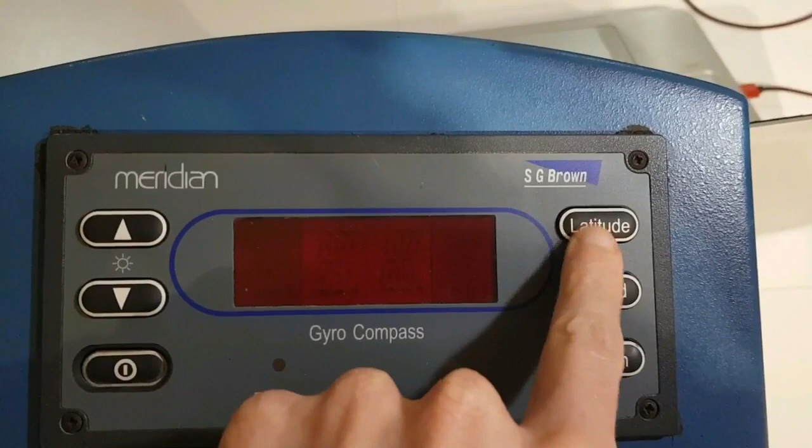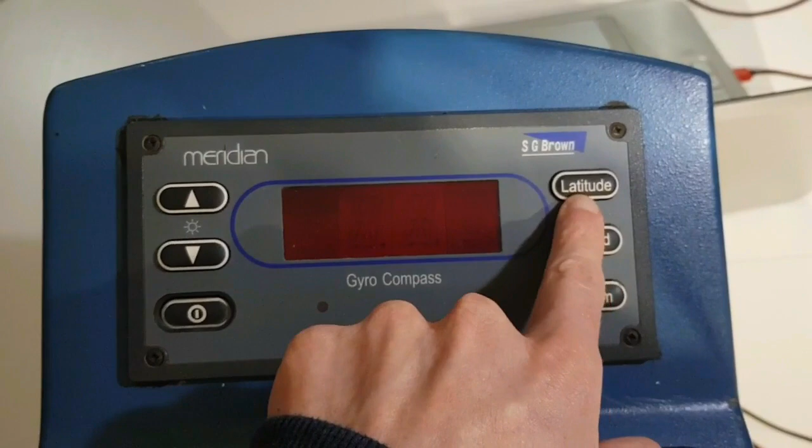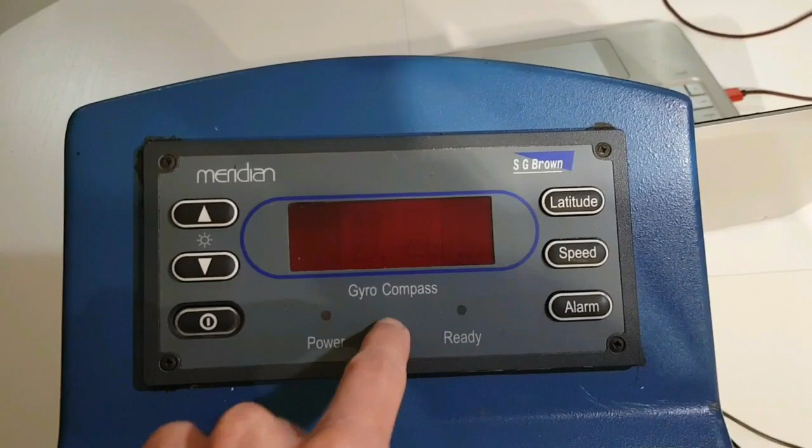The latitude has to be input, and you can use up and down to set your latitude. Same with speed. Although this is a north-seeking gyro compass, as with all gyro compasses, you need to set in your latitude manually, unless you have the optional input of a GPS unit, which this one will take, and that will automatically keep the latitude and speed updated so you don't have to worry about it. But if you're using it manually without the GPS facility, latitude and speed corrections must be made into this unit regularly.

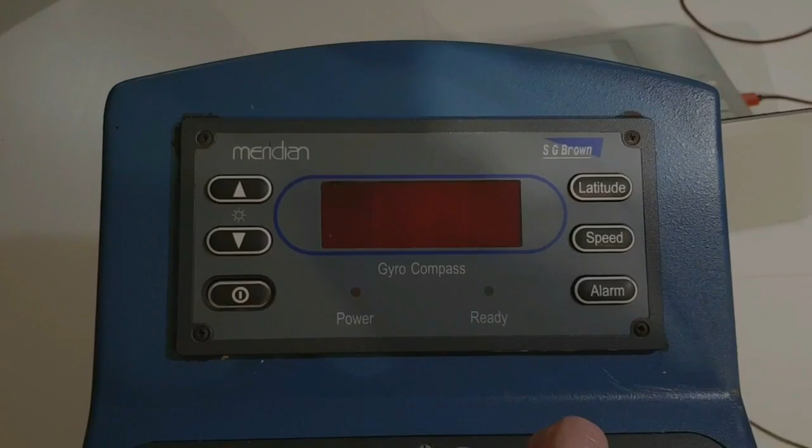I just want to show it in its raw form. This is quite a lot of friction there, in the Z-axis, the Y-axis, again lots of friction, and then the X-axis.

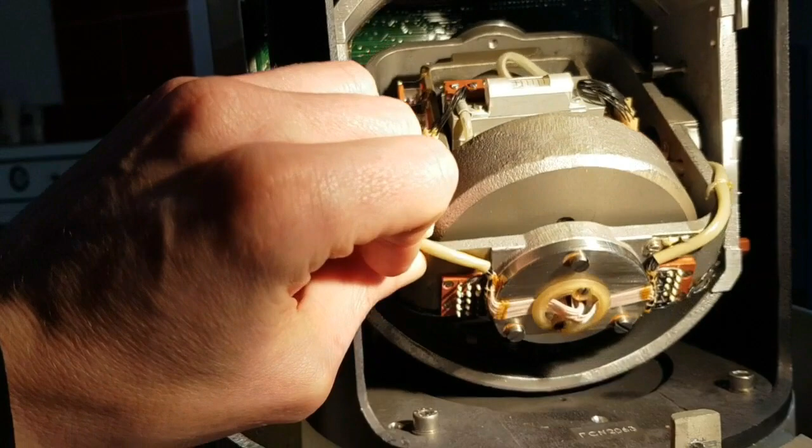So the unit itself is suspended in this cast aluminium gimbal set, really heavy duty, lots of weight. The whole thing is really heavy. And if I start this side, you can see this is a weight here. Got little tiny weights at the side here.

Underneath, on the X-axis, there's loads of weight. This is one of the main weights. This is what keeps it sort of horizontal via gravity.

There's this adjustment pin here. It's threaded so you can adjust it in and out. I guess that's a balancing mechanism.

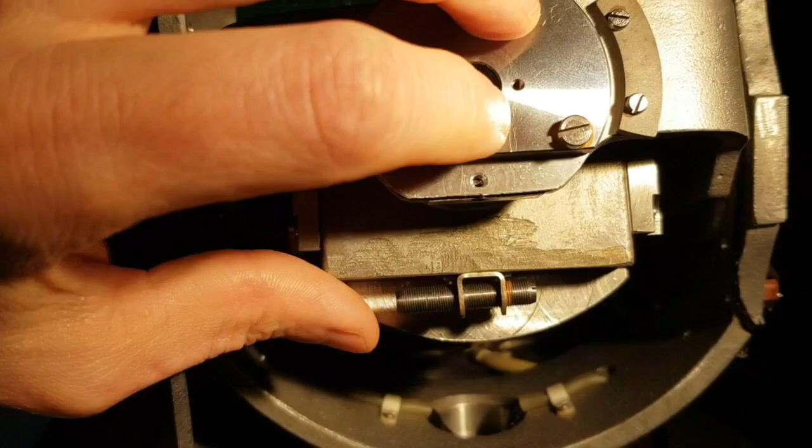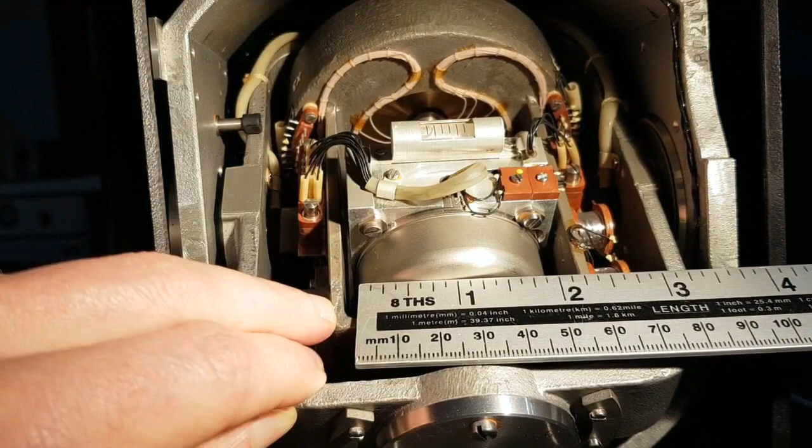The flywheel itself is actually in here. It's absolutely tiny. If you can see that, better. It's about 2 inches, and that's with a casing on it. So the actual flywheel itself is less than 2 inches in diameter.

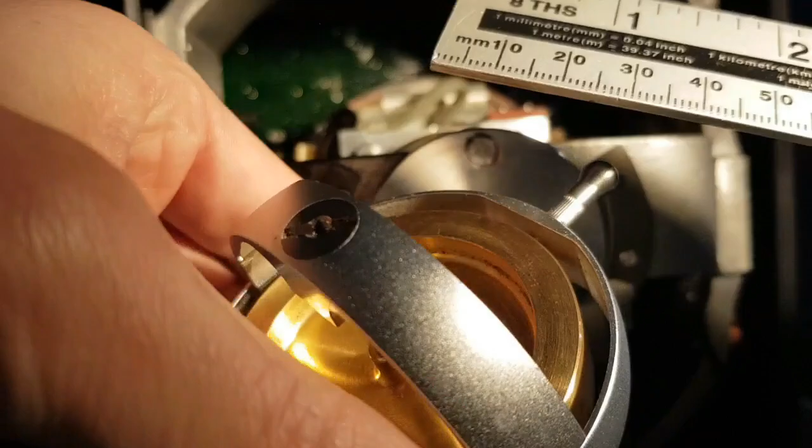If you want to compare that to the super precision gyro, you can see that. The super precision gyro, I measured it at about 53 millimeters diameter. So this is actually smaller. The flywheel in here is smaller than the super precision gyro. So it just goes to show you don't need a very big flywheel to move all of this heavy mass. And it's quite a long way from its center as well, especially this side when I come round to it.

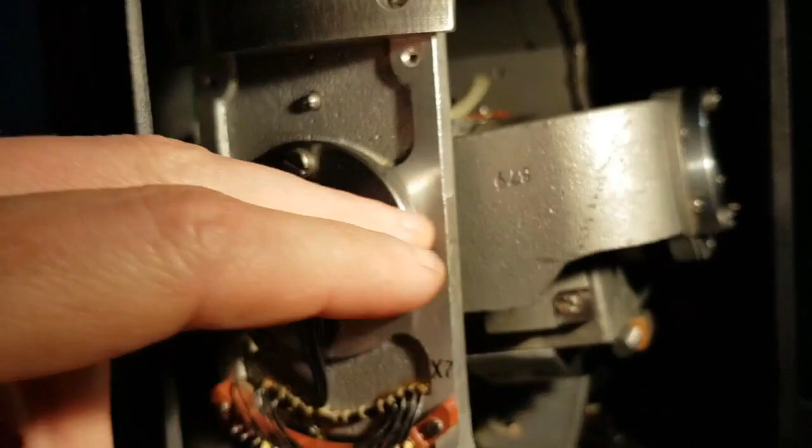See that the flywheel is at the back here. So this is what they call the damper, big heavy weight, and this is top heavy. If you look underneath, it tapers. It's this thing here. It's really thin here as well, the depth of it this way, whereas here it's nearly an inch thick, 3/4 of an inch at least.

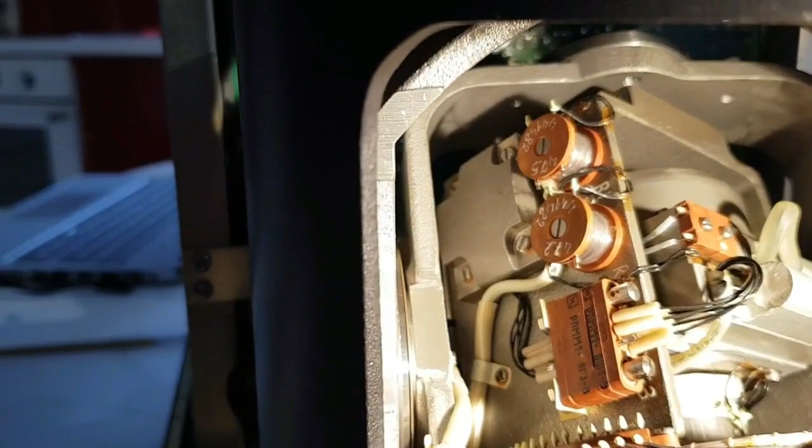So I'll just get into the insides. See the little bubble level there? Incidentally, that never seems to be in the middle when it's running, for some strange reason. You've got these pick-off coils here, loads of connectors. Got connectors down here.

So inside this box here, there are accelerometers, torquers I believe, all sending signals to the control board, so you can actually monitor them signals, which I do intend to do.

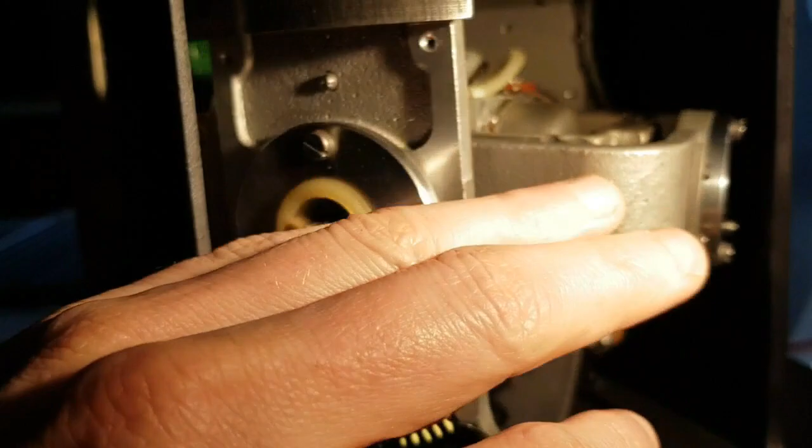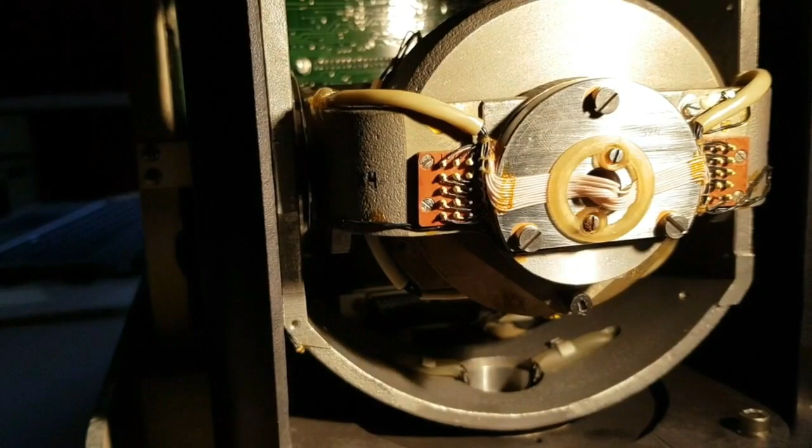But this damper here, what they say this is for, is the gyro as it's seeking north will have a natural tendency to sort of move like this, but obviously much slower than what I'm showing here. And they're saying that the ellipse it traces out, the major axis and the minor axis of the ellipse are proportional. So if you reduce the minor axis magnitude, it also decreases the major axis magnitude, and it makes this ellipse become ever decreasing until it settles on north. That's the theory behind it. That's what this damper's for.

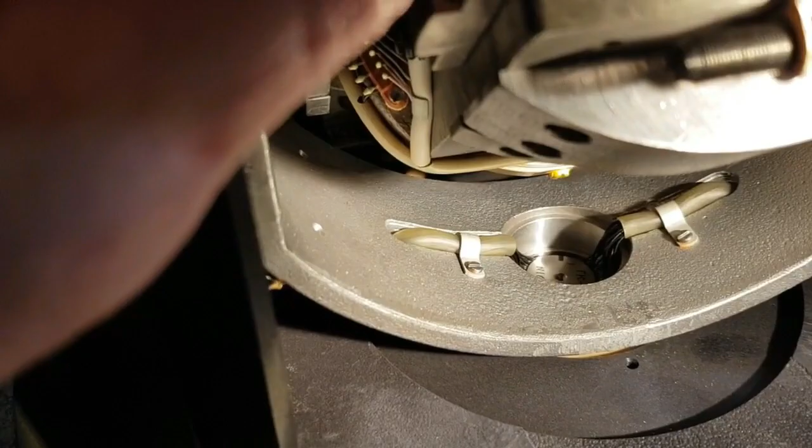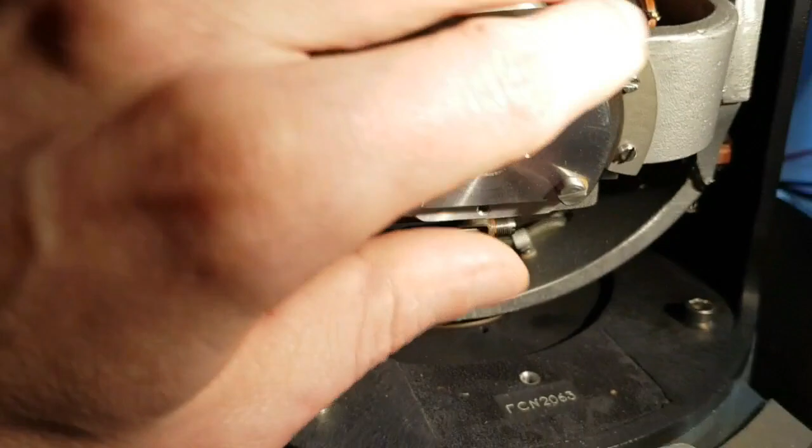During north seeking though, from what I've seen, if it does do that, it is unnoticeable. Down at the bottom there's a motor, the azimuth motor. You can just see the top of it just poking through there, housed within this sort of casing here. You see all the wires in the back there. And then the motor itself is down there.

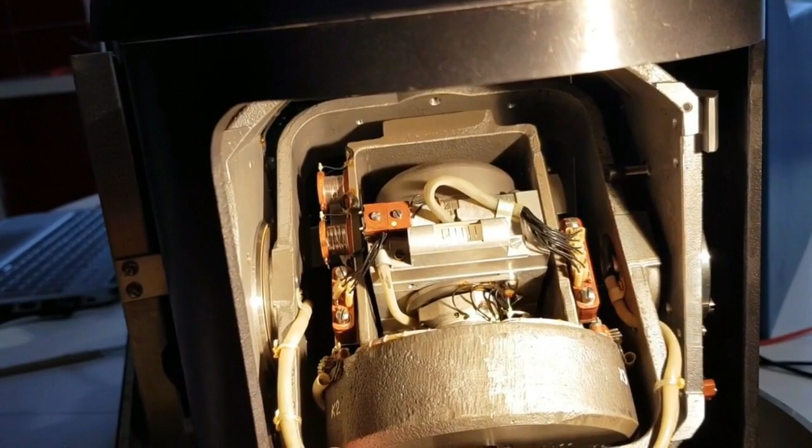One thing I can't find in the manual is what the RPM is of the flywheel. It's the only thing I can't find. In general, the manual's pretty good. It gives circuit diagrams, detailed electronics circuit diagrams. It gives you the operating theory behind this, which to my mind doesn't really explain anything. It explains what it does, but not why it does it. Why north? What's so special about north?

But yes, these weights apparently have a large contribution to how the gyro compass works. They give it the pendulous effect to keep the flywheel horizontal all the time, which is the principle of how these things work - keep the flywheel spin axis horizontal, should I say.

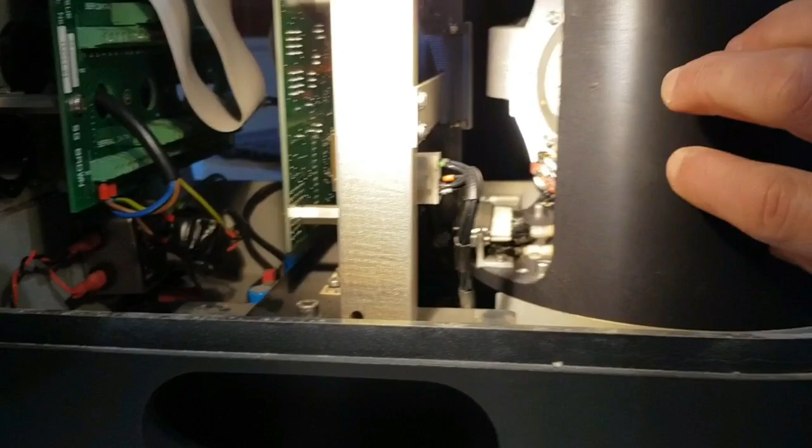So all the outputs and inputs from the actual gyro itself are outputted to here, which then connects into this first PCB board. Just position the light better for you.

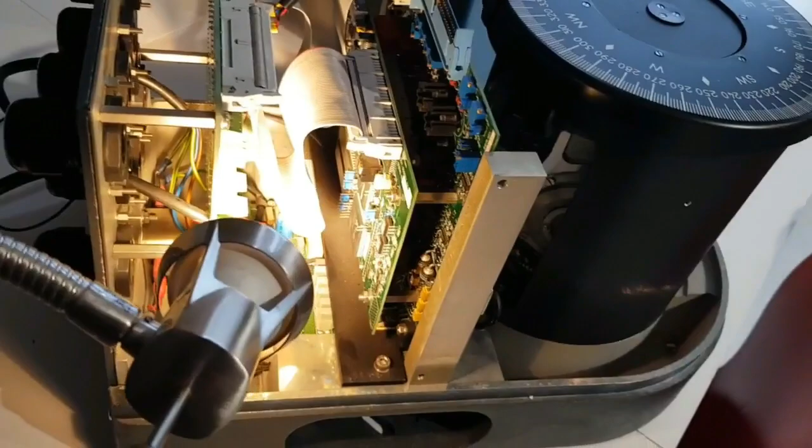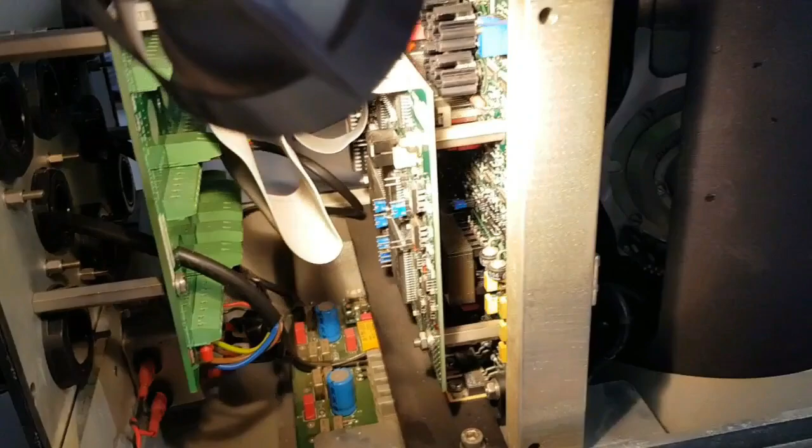There's a first layer there at the back, just behind the gyro compass. Lots and lots of electronics. And then there's another board in front, again lots more electronics. And then there's this output board at the back here.

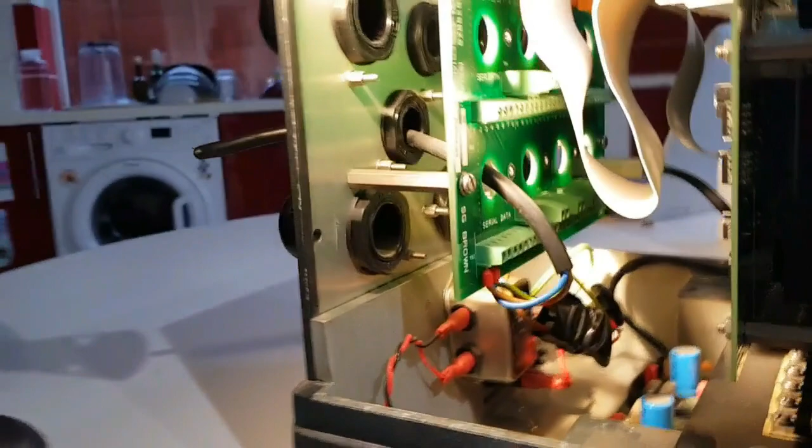So all these green connectors are what we would connect into if we wanted to get the output signals out of this and analyse them on the laptop. There's rows and rows of them - lots of different output signals you can get from all the axes pick-offs.

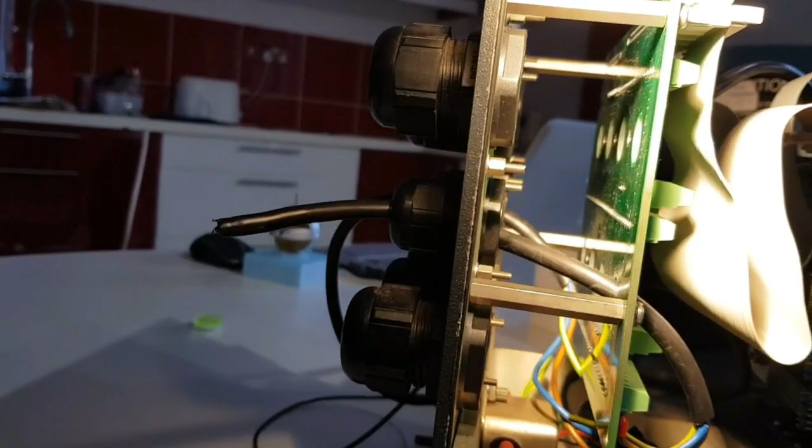And then you obviously feed the cables through these glands at the back. Looks like somebody's already had one here. And this one's just the power supply going in that somebody's adapted inside, down here.

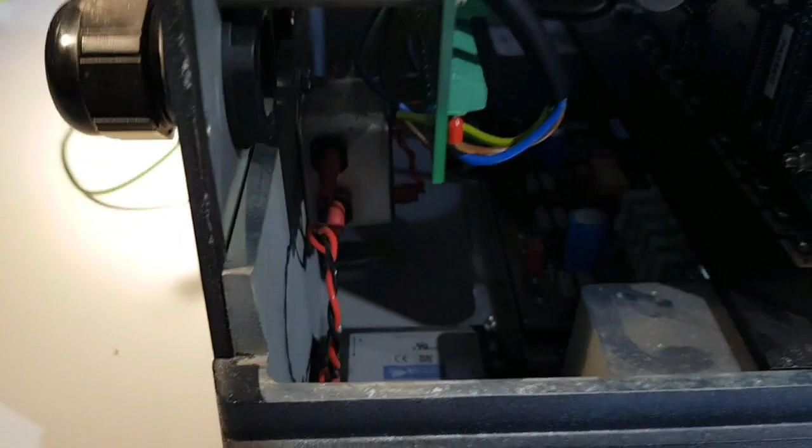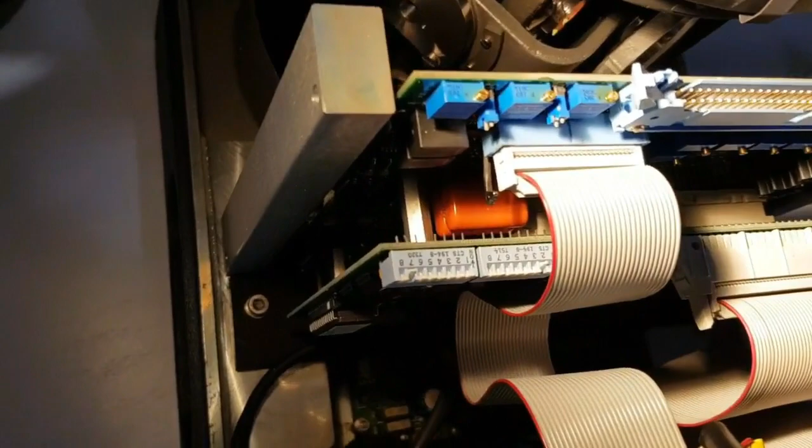So finally, on the other side of the unit, you can see down at the bottom there's another circuit board. And at the top here, there are some dip switches, which I'm not touching, and there are some pots there. And this is a 60-way test connector, and you can actually access that via this removable panel and the dip switches and the pots.

So next I'm going to show a video sped up of this thing actually seeking north with the case removed, so we can actually see what the gyro is doing.

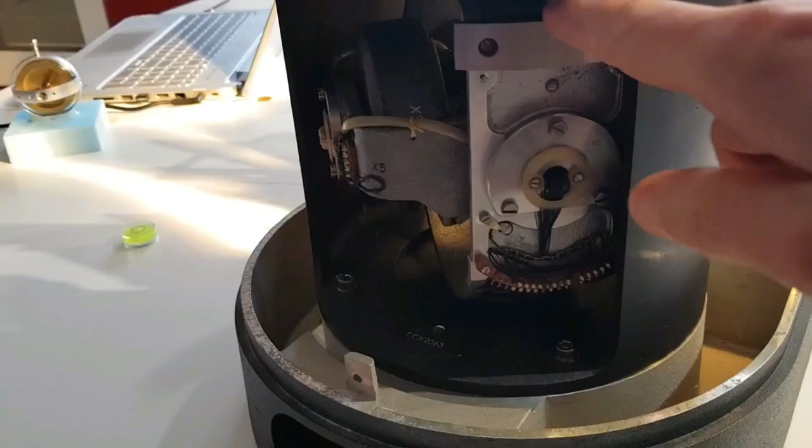Okay, so the unit started, and in this instance, the gyro flywheel, or the gyro axis, is facing west of north. So you'll see the y-axis start to rise just to find its level, and then initially it starts turning counterclockwise, only very slightly, before then moving clockwise to find its north position, and you'll notice it overshoots slightly as well and has to come back. This process took approximately 46 minutes.

And if I scrub back and forth quickly, you see how the y-axis hardly seems to move.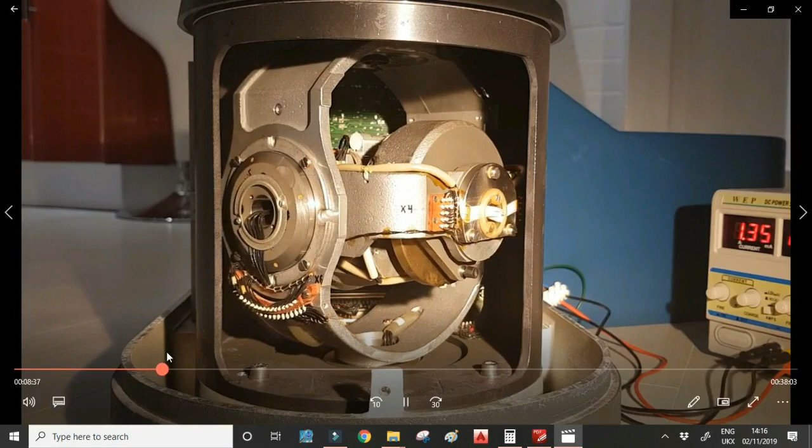So this is another test with the gyro axis flywheel, or the spin axis, facing east of north. And if I scrub forward, you'll see it starts moving counterclockwise straight away. Again, it overshoots and has to come back on itself. And if I scrub back and forth quickly again, you'll see that you can hardly see any movement in the y-axis.

I often find these things easier to visualize when using a globe. So I'm going to stick my super precision gyroscope just here in the UK. Doesn't matter which way it's orientated at this point.

We all know that the rigidity in space property is the assumption that the Earth spins west to east, and the gyro wants to maintain rigidity in space. So to an observer in the UK here, it's gone clockwise - you see it's turning clockwise. Always, in the northern hemisphere, no matter where, it's going to want to turn clockwise. That's the premise, okay? It doesn't matter if the flywheel is spinning that way.

It doesn't matter if the flywheel is spinning that way. You'll still want to be rigid in space. Or if it's spinning the opposite way, if you turn it round and it's spinning the opposite way, doesn't matter - it always wants to turn clockwise to remain rigid in space if the Earth is moving from west to east, okay?

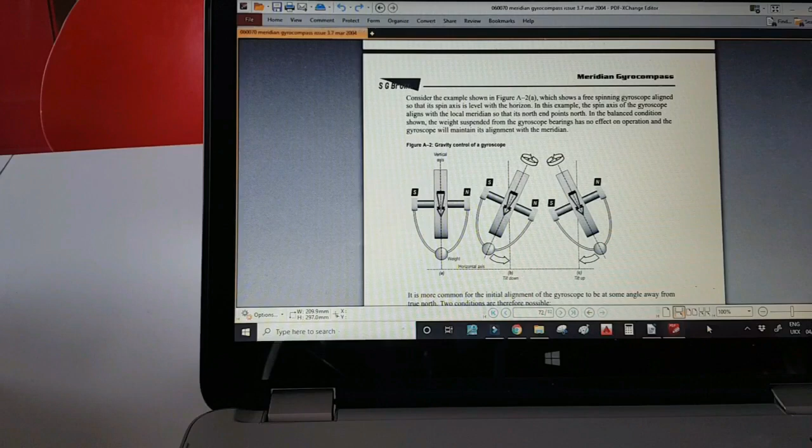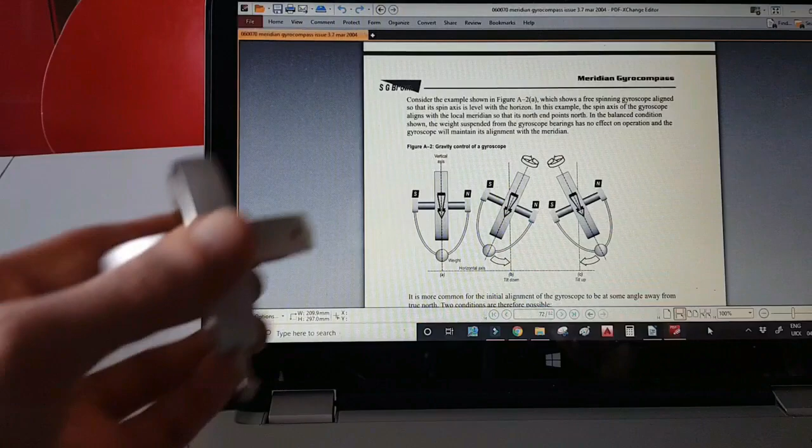This is the section in the manual that goes over the operating theory of the gyrocompass. I'm going to use my super precision gyro again as a visual aid.

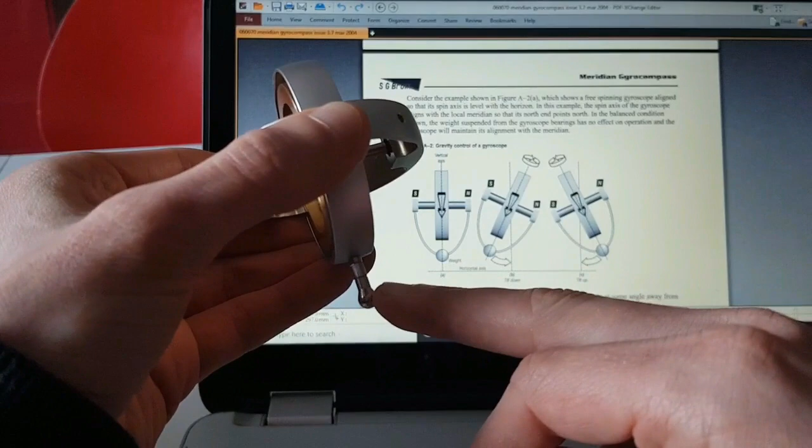Let's say this side is north, this is south. We've got a weight on the bottom here, and we're going to orient it like it's shown on the diagram. So we're looking at a side-on view. You can see the vertical axis there and the weight on the bottom.

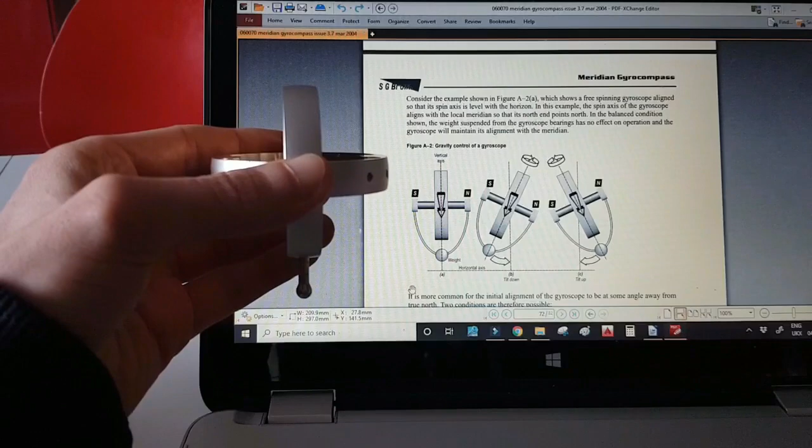Consider the example shown in Figure A-2(a), which shows a free spinning gyroscope aligned so that its spin axis is level with the horizon. In this example, the spin axis of the gyroscope aligns with the local meridian so that its north end points north, like this. In the balanced condition shown, the weight suspended from the gyroscope bearings has no effect on operation.

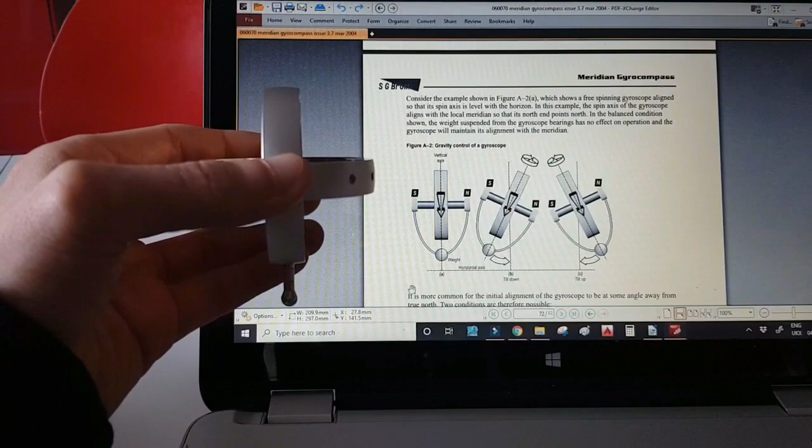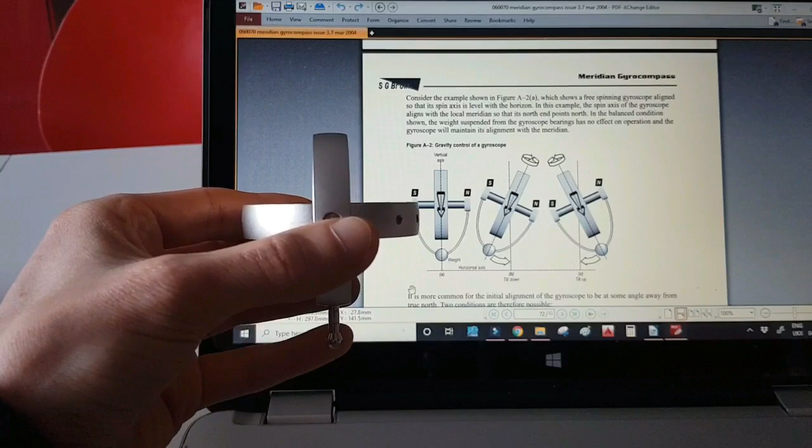We're assuming that true north is this direction. So we have it aligned with true north, and in this balanced condition, this weight at the bottom—gravity is keeping it there, the axis is aligned with the meridian, and therefore nothing happens, it just stays nice and level.

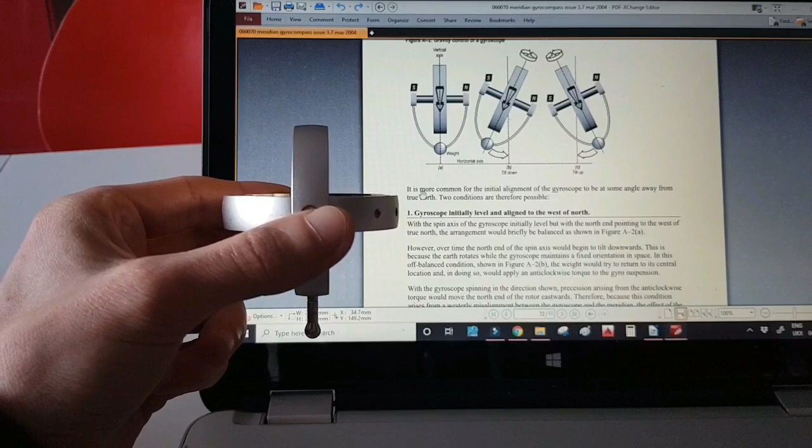It's more common for the initial alignment of the gyroscope, however, to be at some angle away from true north. So two conditions apply: first, the gyroscope's initially level and aligned to the west of north, and then to the east of north. Let's go over the west of north first.

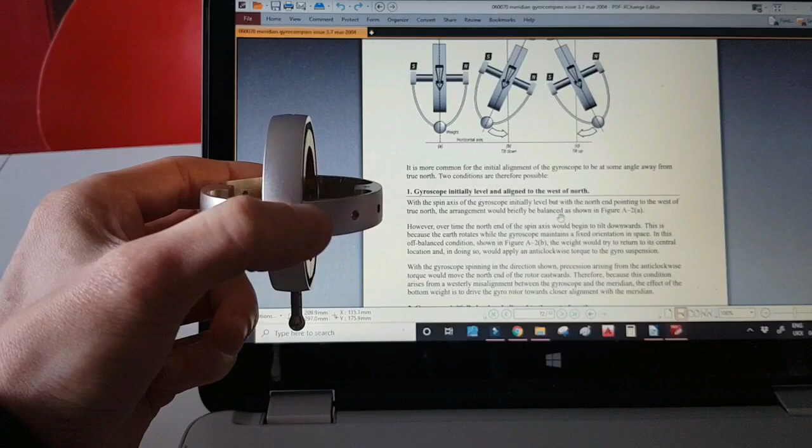With the spin axis of the gyroscope initially level, but with the north end pointing to the west of true north, the arrangement will briefly be balanced as shown in figure A-2(a). So we're going to move west of north that way, and initially it's balanced like this. The gyroscope's not running at this point.

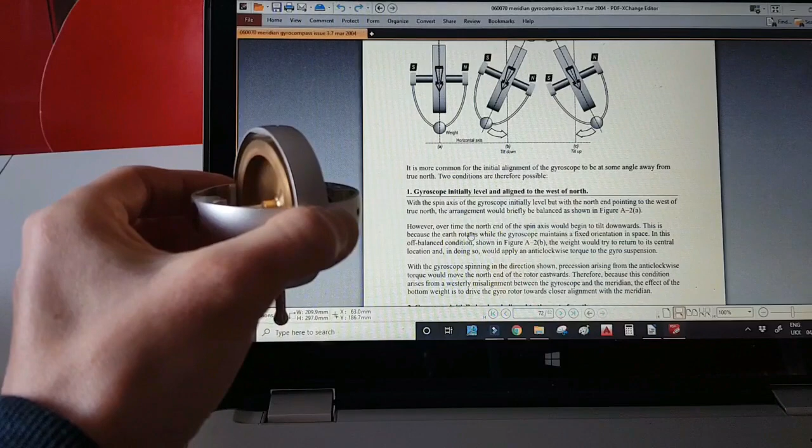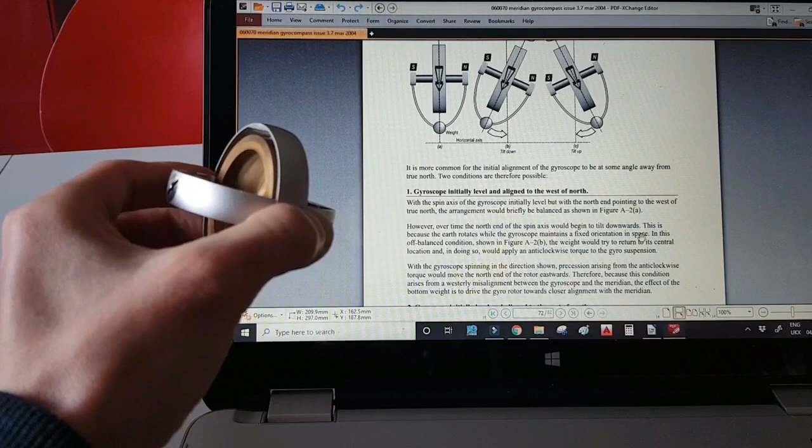However, over time, as the gyro's getting up to speed, the north end of the spin axis would begin to tilt downwards, like so. This is because the Earth rotates while the gyroscope maintains a fixed orientation in space—rigidity in space, right? That's what that's saying. So the reason that's tilting down like that is because of the property of rigidity in space of a gyroscope.

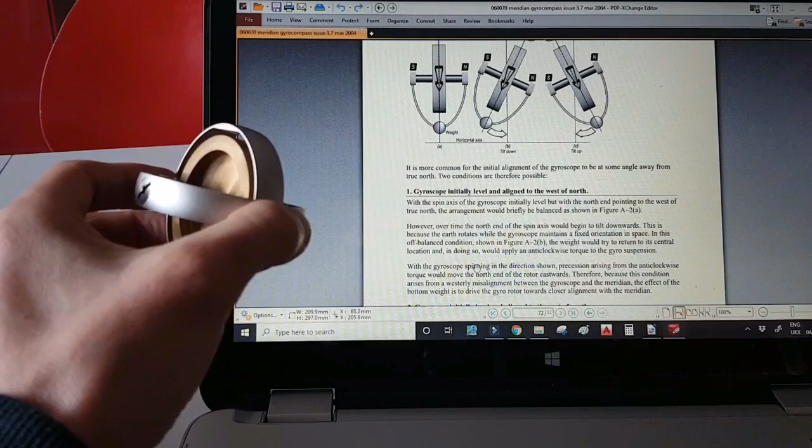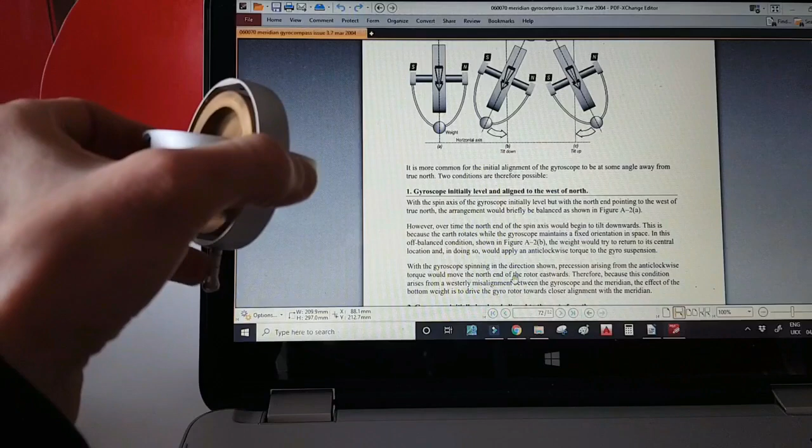In this off-balance condition, as shown in A-2(b), the weight would try to return it to its central location, and in doing so would apply an anti-clockwise torque to the gyro suspension. With the gyro spinning in the direction shown, precession arising from the anti-clockwise torque would move the north end of the rotor eastwards. So this weight on the bottom is trying to pull it down level again, and in doing so, it's moving this back round to the north until it aligns with the meridian again.

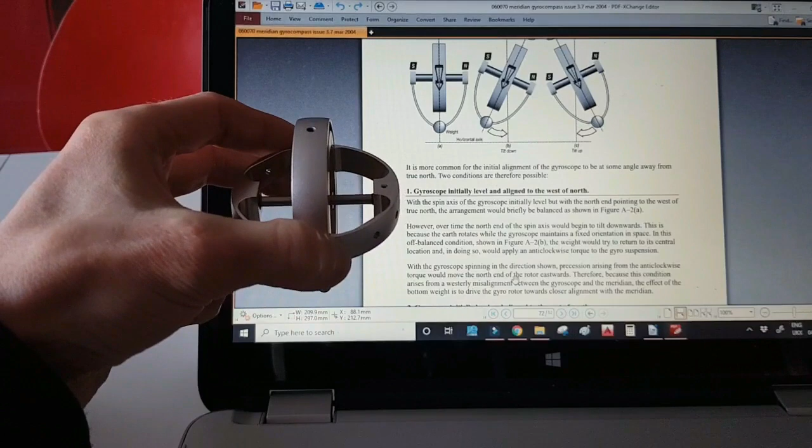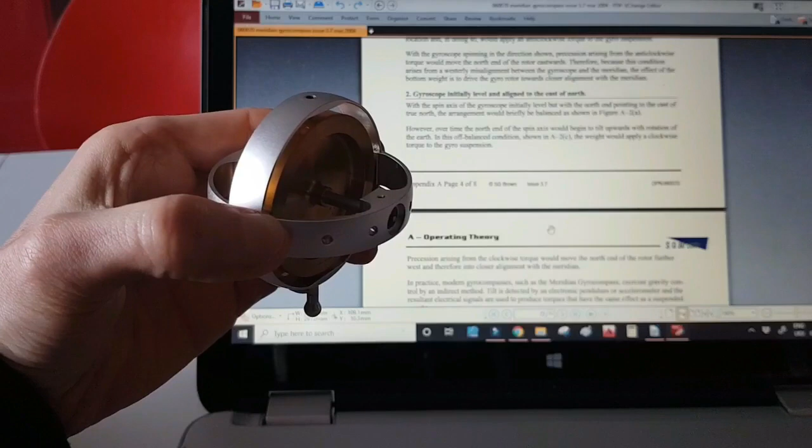Now let's go to the east version. It's initially aligned east of north, which is this way. This time, it's saying that the north end would begin to tilt upwards with the rotation of the Earth—again, rigidity in space.

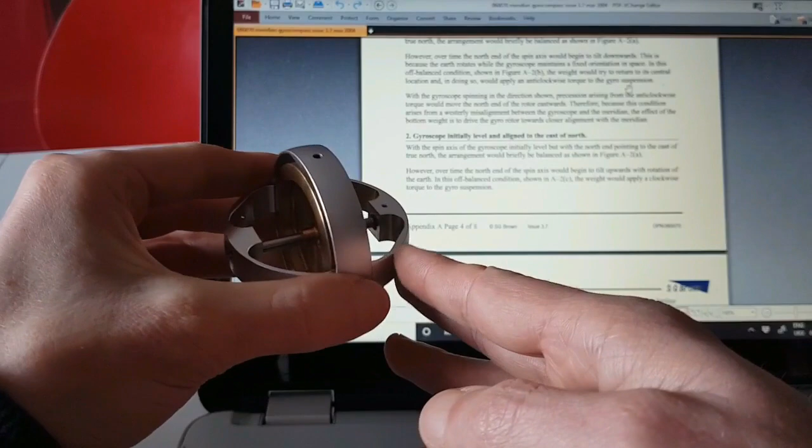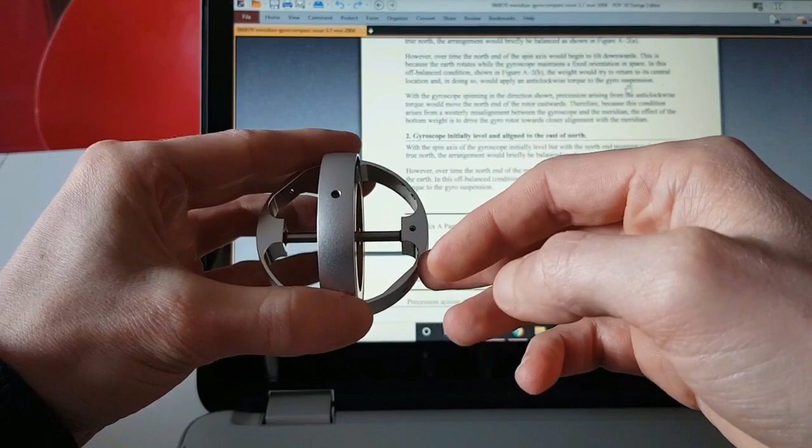If you couple this together with the damping effect I mentioned earlier, using that big heavy weight on the bottom of the gyro in the gyro compass, and the elliptical pattern it's supposed to trace out, I believe it's trying to get itself closer to the meridian. Why it stops on the meridian, I have no idea. But I do believe it is doing this, although it's so minuscule and the reactions within the gyro compass occur so quickly that you can't actually see it happening.

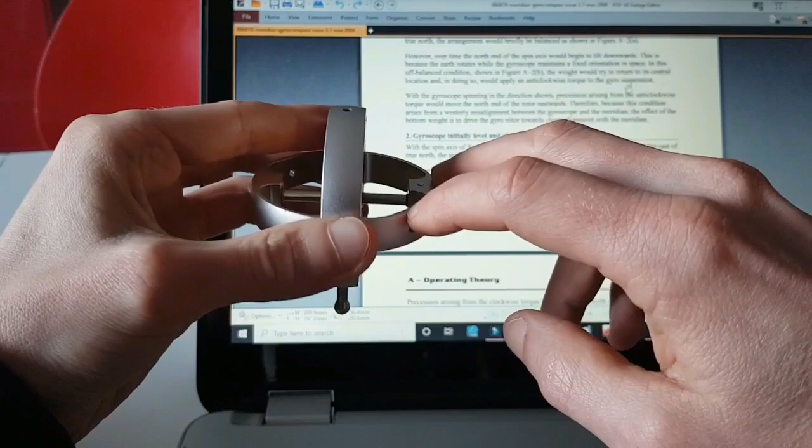So I'm now going to show 3 hours worth of north-seeking tests in approximately 3 minutes, sped up of course to show the movement more clearly. It's worth noting here that the gyro compass works in 2 steps: north-seeking and north-keeping.